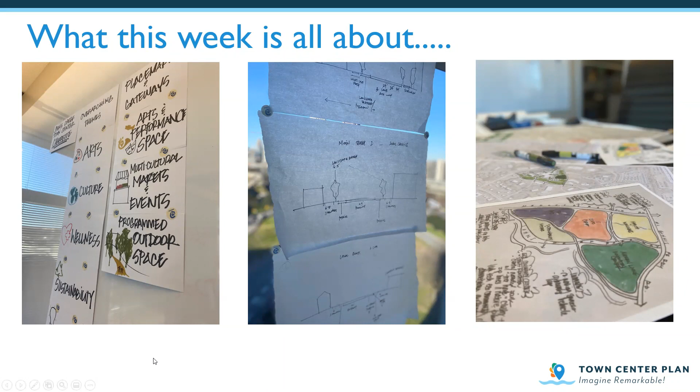So the first thing we did this week is create a series of design principles and vision.

We've proposed this vision for Johns Creek Town Center, that it is an iconic destination that represents the city's diversity, culture, and values. As both a gateway and a connector, the town center incorporates a series of experiences that appeal to a variety of audiences and age groups. This inclusive and remarkable place is defined by a series of neighborhoods connected via natural resources and greenways that is synonymous with wellness and sustainable living.

So this proposed vision was taken from ideas from interviews we had with stakeholders, from public comments using the Social Pinpoint website, and looking at physical characteristics of the site to create this broad vision. It's aspirational, what we want to see in 20 years and what we want to see happen over time.

The outgrowth of that are a series of design principles. So the goal is, as we come up with ideas and concepts, we want to make sure that the ideas and concepts align with these design principles.

The first one being is that town center's identity focuses on a clear connection between arts, culture, wellness, sustainability, and innovation. And beneath that come all the land uses that make a vibrant town center: office, residential, commercial, light industrial, innovation, thinking about wellness, as we mentioned there, thinking about sustainability and best practices in building and design. All those are couched in this idea.

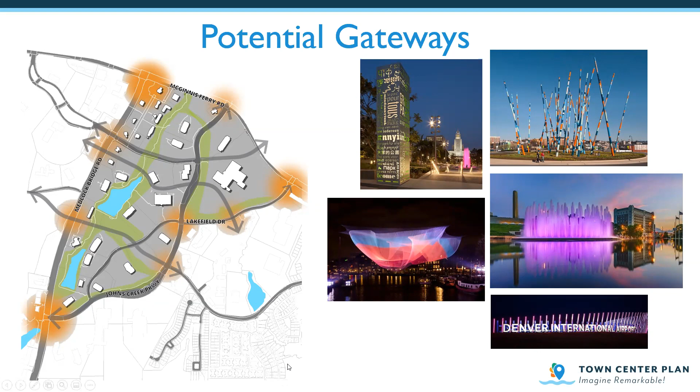We've talked a lot about different cultures and the way they do food and markets. So this idea of a year-round amazing concept for not just a farmer's market on Saturday, but a year-round regional destination. This could be something amazing and distinctive that other communities do not have regionally.

The idea of wellness. This town center is literally next door to Emory Healthcare. How do we engage those individuals? How do we engage Emory, bring it in and link those two, but promote wellness as a community? And that appeals to many people.

Sustainability and this idea of a biophilic city where we connect both people and nature in a unique place is something that draws inspiration, and it's done elsewhere, but it can be taken to the next level. And that's directly linked to the idea of innovation, right?

This idea that we need to be forward thinking about our architecture, forward thinking how we are going to do business in the future, forward thinking about our public spaces, forward thinking about our building and our build out, forward thinking about our stormwater management. These are all things that will help us innovate in the long term. And we have to be thinking this way because this is a 20-year vision.

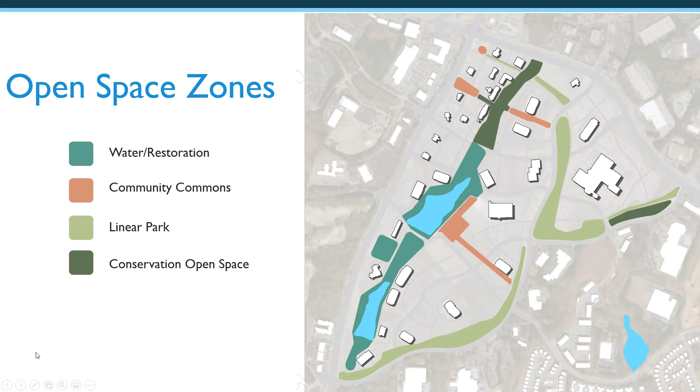So we took these open space zones and we began identifying key potential elements and items. And these are just a few. When you're talking about water restoration, how can we make it a place of play, bringing people closer to the pond's edge and making it a community space? How can we restore some of the ecology of the area, the streams, especially north of the northernmost pond, and really activate those spaces and really make it a learning opportunity?

With the community commons, where are the spaces we can create where we can bring people out, sitting next to cafes, enjoying their friends, playing cornhole, pop-up activities, enjoying art, having a programmed space for outdoor activities.

In the linear park, you can have both amazing open space opportunities, but the opportunity for a dog park, an organized space for a dog park, or an organized space for play, a true play for all ages, like you see here, that's represented in Maggie Daley Park in Chicago, or conservation open space, where these areas that are forested or areas even in Linear Park, how do we maintain them, preserve them, but give people greater access to nature and be sensitive to what we have out there in the natural environment?

So there's all these different tools and activities that can be done and strategies to really make these open spaces really an advantage and a great return on investment for the community.

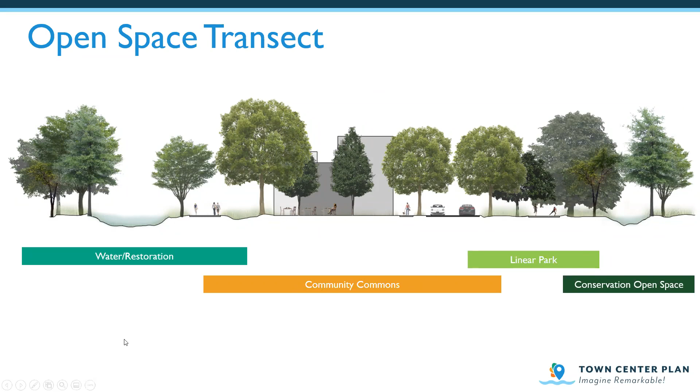So we took this idea and added another level, building a story from the existing conditions, themes, and gateways up to the open space and parks. We added another layer: this idea of the street grid, or designing a walkable community town center with a clear hierarchy of roads and spaces.

And really accentuating that, thinking about new connections and maybe dividing up the State Farm parcel, making more options here. This creates redundancy in the network, gives people more options as they're traveling through the space, and makes it more manageable from a traffic operations standpoint, but also opens up walkable neighborhoods with huge possibilities for diversity in what happens in them.

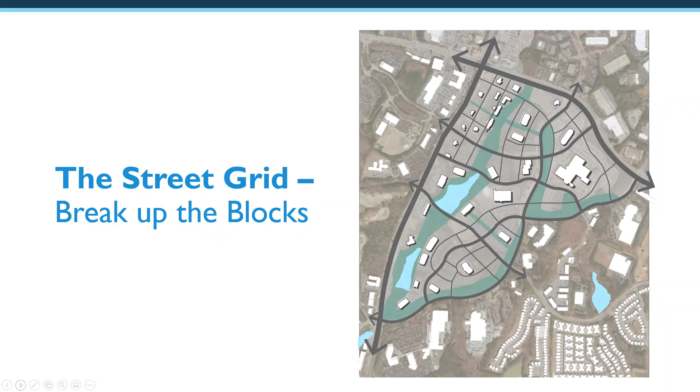So let's talk a little bit about these. We have these streetscape typologies: major highways, what we call main streets — the major thoroughfares through the area — a couple of options of shared streets, which we actually refined earlier, some locations of shared streets, and even local streets that connect people. Let's talk about each of these for a moment.

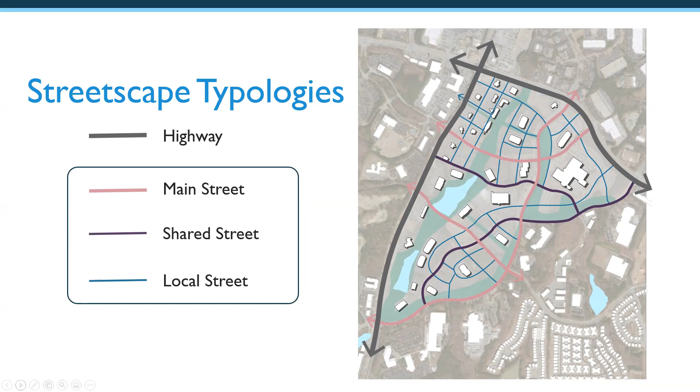By doing that, instead of having a roadway with a very wide buffer and very little activity in the middle, you can consolidate the roadway, introduce a very active multi-use path, introduce a linear park, and conserve and enhance a lot of open space that currently is not used well.

This also creates front doors for potential development sites like State Farm and other office parcels here — an innovative idea that works within the right-of-way, just using the existing public right-of-way better. And this now creates a parallel opportunity, in addition to a great main street, to parallel what's happening with the stream.

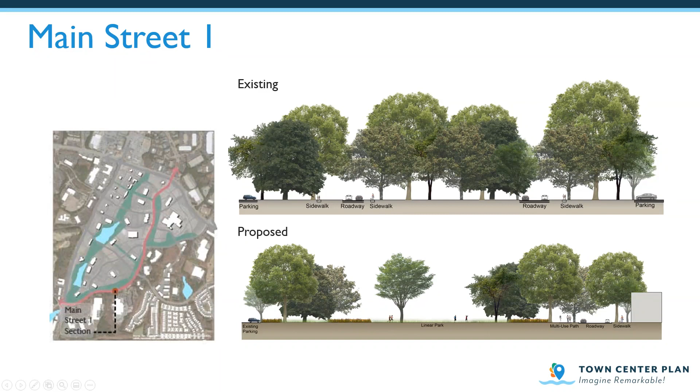That's the idea of some main streets through here as well. What you're doing on the main streets — some of these roads are simply 2-lane roads with very narrow sidewalks and limited buffers. You run on the backside of the road.

The same can be true for McGinnis Ferry. No one wants to walk down McGinnis Ferry — it's not comfortable, there are no buffers, it feels unsafe. Here's what we're trying to propose: as we retrofit these roads or add new road extensions, let's make the road more valuable.

Introducing on-street parking to support businesses, and establishing buffers for shade and trees and wider sidewalks, so you don't have to walk single file but can walk next to your spouse or friend as you're leisurely walking and looking at retail. This then activates the space behind the street, within the private right-of-way, to encourage redevelopment potential.

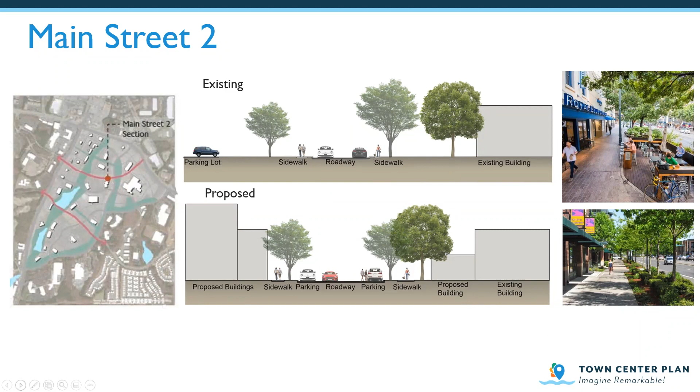We also have these ideas of local streets. We have some local street opportunities in here as well. They may not be as major, but you may still be able to find some on-street parking. It's typically 2-lane roads, and you might find them in more residential areas as well. So that is also an option.

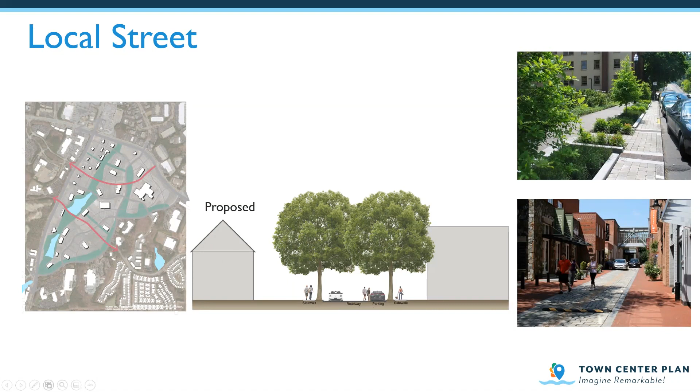And we also have these ideas of shared streets as well. These are not entirely all shared streets — what we were trying to highlight in certain segments, this is an incorrect map, but there are a couple of different locations in and around Johns Creek where you can take a block or two and turn a typical roadway with on-street parking into a shared street like you see on the right-hand side, something that can be closed down during the day.

It's a place where community spaces can gather and really activate the space in this corridor. So just a new idea, but it's innovative, and it lets us rethink how we do shared spaces and shared roadways.

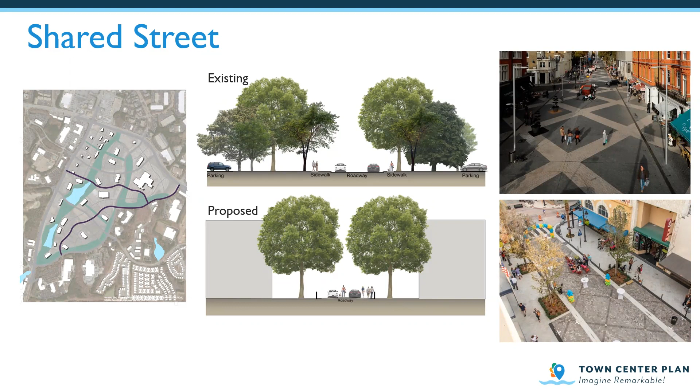So what we began doing after that is experimenting, as the TAC members know, with different areas of this entire area. I will show you that momentarily. But this is the entire 192 acres, and these are very possible uses.

As I mentioned, we began just kind of looking at building out the street grid network and adding in different potential uses. These can be mixed and matched, I want to be clear with that. But this gives you some form to think about how you can conceptually think about the different uses in and around here.

Whether it's civic uses, for instance, around City Hall and other places, or places of wellness like the existing Lifetime Fitness or maybe a new wellness center. You have mixed use, maybe 3 to 4 stories with residential on top of retail, or smaller, more village style or community residential on top of commercial 1 to 2 stories. You have shop fronts, which strengthens the edge along Medlock Bridge and McGinnis Ferry.

And the idea of office is thought about in this space as well, more office space intermingled through here. There's a whole potential to mix and match these ideas. It's a first snapshot. When you look at this, what I want you to see is there is now some structure to this and a more efficient use of development than what currently exists.

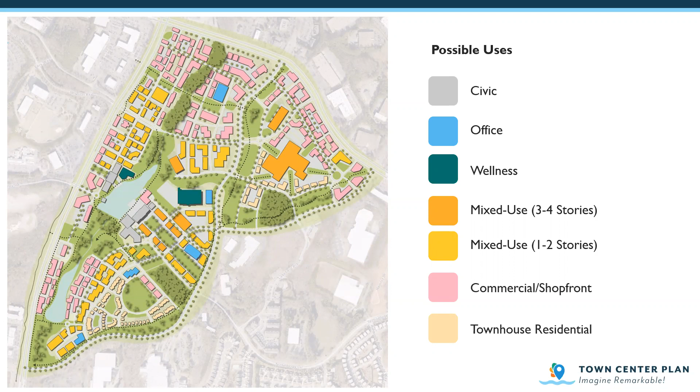When I look at that, what I see is structure forming, right? And when you see this, you should say this structure can be flexible. And so over time, as it responds to market conditions, we're going to continue looking at this and refining it.

As I mentioned, during the course of the week, we began this process by kind of chunking out these different areas, looking at the civic core area here first at a more granular level. And then this area, what we're calling Creekside, which we think has a really great branding opportunity. Really think about this as the Creekside Town Center, this idea of the Medlock McGinnis Corner.

This is the gateway not only into Johns Creek, but into an entirely new county. Huge opportunity to draw people from Forsyth County and market potential from Forsyth County. And then the State Farm area, right, kind of a campus in of itself. But how can we better link those two together?

So we begin, like I said, large scale, looking at the grid, the open space, the natural resources, and then begin building out a framework. So we're going to go through each of these now individually, beginning with number 1, which is the civic core.

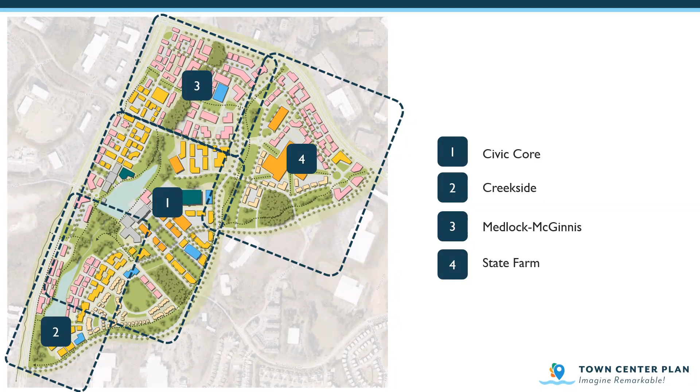As you can see, this is kind of our sketch where we began sketching out our ideas here with the civic core originally. We played around with a lot of different ideas. As the TAC members can attest, we modified this during the week and sketched out a couple of different alternatives.

But a couple of things we are looking at, I want to point out that could be really cool and really key to this. Number 1 is this idea of play. The civic area here, this is City Hall, currently parking lots. Our thought is to make a strong central core here of open space, and then redevelopment that actually looks out onto the open space, okay?

This idea that you can begin introducing iconic art at gateways and entertainment, maybe further down as you begin thinking about retrofitting these buildings with new arts, food and beverage opportunities—maybe a brewery or distillery, high-end dining. These are things that currently don't exist here but are a real draw further down in Creekside that we'll talk about momentarily. And there's opportunities for roundabouts and consistent themes, but don't just do a roundabout—do a roundabout with public art and really amazing opportunities.

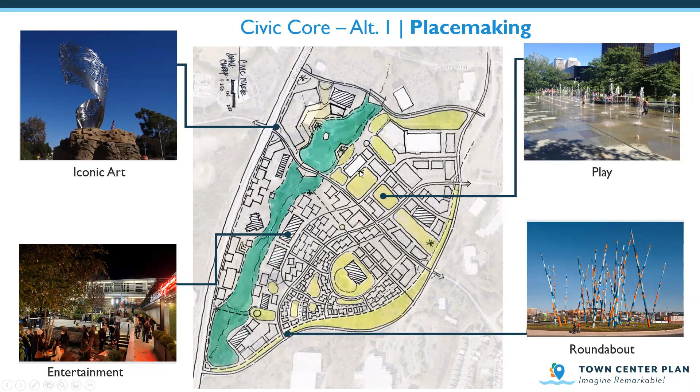So we began playing with this idea of the civic core, a community common space where people can engage one another and come out. And as part of that, we began testing other ideas.

Well, what about how do we begin thinking about farmers markets? How does that initiate? What does that look like? Could it be here? Could it be further down the way? How do we link the farmers market concept to the food and beverage and kind of an urban ag idea long term? That could be really innovative and not really done too much around here.

Maybe over time this area over here redevelops with different parts of residential. Maybe it warrants a new community center as a central space rather than a current office building. That might be a new use somewhere in around here.

New residential communities with high quality development and a diverse group of residential styles. And then storefronts in and around these commercial opportunities. The storefronts are critical because they need to be very much linked to streetscapes. They need to be very permeable, so it's walkable, and people can sit outside and connect.

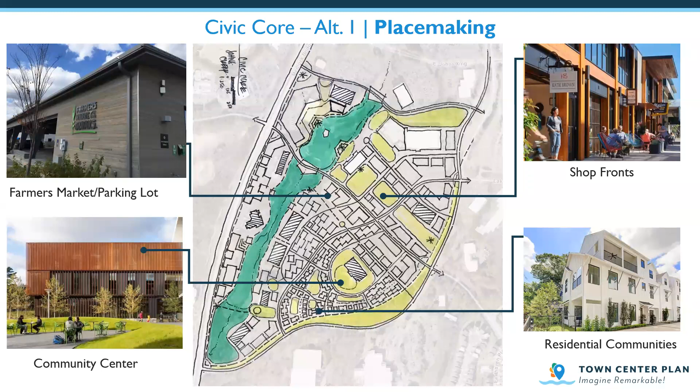So one of the things we began doing is we took this idea of this corner, this Civic Commons area, and some people were asking, okay, what does this look like in real life? Are we just drawing lines on a map, or what does this feel like in 3D? So here's an example of one.

So there's a lot of opportunities here in this space specifically.

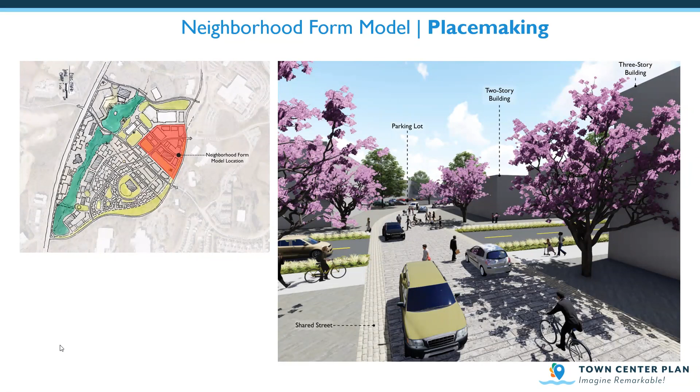Well, we did this for fun today. We built this out yesterday evening and this morning, just as an example. Things I want to point out—only the massing here, this is not really, but this represents what we've kind of drawn in. So now this becomes a place where you have storefronts opening up, a place to linger longer, to have entertainment.

We thought of this idea to continue the theme that this area along Johns Creek actually drains as a watershed down to the ponds. So wouldn't it be great to mimic that flow of water using this pathway, with open water themes, kind of ponds, spaces for stage areas, different elevations that all link down towards your city hall in the distance, with a shared street concept where people can linger and move freely through, outdoor patio seating for restaurants and bars. This can be a vibrant space long-term.

And remember, what you're looking at is public space. And one of the things we point out—and the reason we focused on civic core so much this week—is this is publicly owned land.

What can the city do to catalyze future development over time? Again, this isn't going to be overnight, but this could be a vision 5, 10 years from now. This is what the space you're experiencing and how it gets redeveloped over time.

These buildings incorporate covered parking. No longer do you just have some on-street parking, but you now have covered parking wrapped around with retail. You have maybe potentially a performing arts theater in the back here with a community civic center. These are all things massed out to represent that scale, that what could potentially happen here. Very cool ideas, very high level, but we wanted everyone to experience the space and the potential.

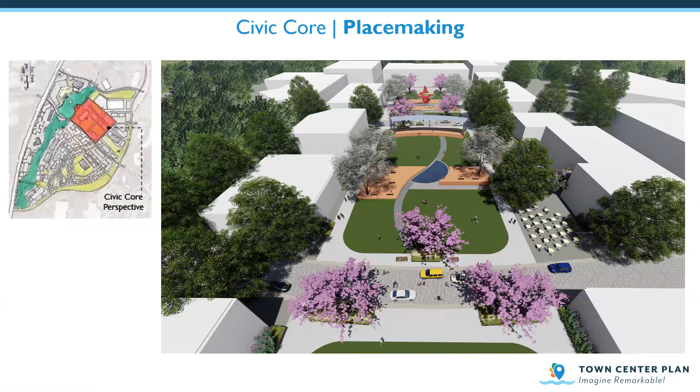We began saying, as a build on of that, what happens in these spaces? There's so many potentials, right? We believe there's a strong opportunity to connect the ponds to the back of City Hall as a starting point. What a great catalyst project, right? Linking the ponds and City Hall.

How do we bring people closer to the ponds? Floating decks allow them to move around and really engage the ponds better. A really cool immersive experience here could happen. Imagine out here that you even have maybe a deck where a symphony is playing for a concert and you're sitting over here in the amphitheater. Or what if this becomes the performing arts center potentially long term that has this iconic entrance and gateway into the space? Or even a great mixed use feel that creates this great connection here.

These are all things that can happen, but they need to be planned over time so you can take advantage of the natural assets and your public assets, which is really important. So many opportunities to kind of connect to different components of this.

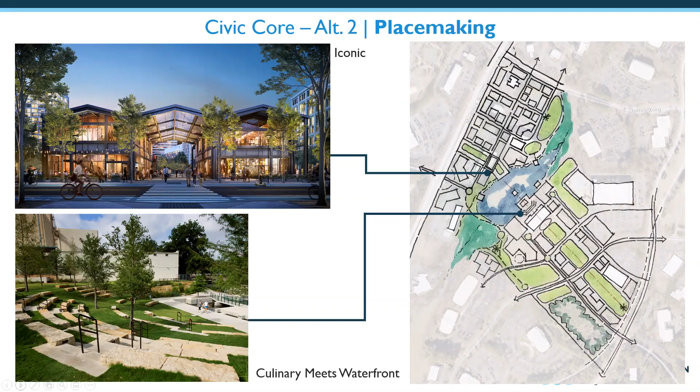The next items, you're not going to get any 3D renderings yet. We're still in the process of playing with those ideas, but we took this to the next level of this kind of creekside concept, which is here's City Hall where my mouse is. This is looking, so the north is up.

This is Medlock Bridge here, Johns Creek Parkway here, Lakefield here. So this area, and this is really conceptually, this is not what the ponds look like. I know this is kind of a blue color on here, but the pond is really more here, not all the way up here. This is this kind of artist coloring.

But think about this for a moment, this creekside concept all along through here. What could this be? Look over here to the right. This could be a great, amazing space where you have food and beverage, linking amazing spaces for outdoor activities along the creek, just like this space is here. Opportunities for flexible scenic walkways and pathways entirely around the creek.

I use this option too. This is from the High Line in New York, and obviously we're not doing the High Line here, but whatever we do, even in the finest of details, in the benches you do, and the trash receptacles you select, and the pavilions you build, need to represent Johns Creek. They need to be uniquely Johns Creek.

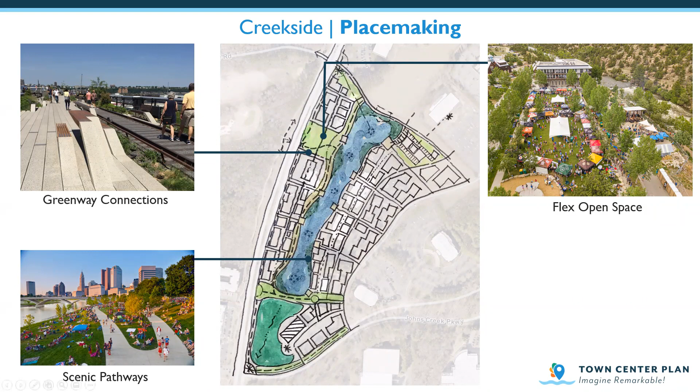So I think that is really important to keep in mind. We transferred up to Medlock and McGinnis Ferry. Key things to point out here: this corner, there's already an existing grid that was established when this was originally developed. Let's continue thinking this out.

This is an immersive art experience in here. This is actually the tunnel under Medlock right now. It's a great space, but it kind of leads to a very unexciting pathway, but could potentially lead all the way back past the existing hotels, which are seen still here, existing, to the creek.

You could introduce along the space a nature walk down along the creek. You could do immersive art in this space here along the pathways. This creates a lot of interest because now you have people who have office here, you have hospitality, you have restaurants. Wow, this is really interesting. Now people can come across the way and really have an engaging experience, spending more time along the creek and visiting more space. So this will take place over time to be sure.

We think there's a lot of synergy with this idea of Emory Healthcare, Johns Creek next door, opposite Medlock Bridge right over here. There's a need for an expansion of wellness, a great concept for town center to be a center of wellness. We use this existing building as an opportunity. Could this be retrofitted long-term? Do you build a new building? Is this even the location for a wellness center? Possibly. But wouldn't it be great to have a wellness center over here, 20 to 25,000 square feet along the riverfront, which then spurs other development opportunities for medical office and medical research opportunities linked to wellness. And by the way, it's on a creek along a trail network that promotes further health and wellness. So a lot of synergy there.

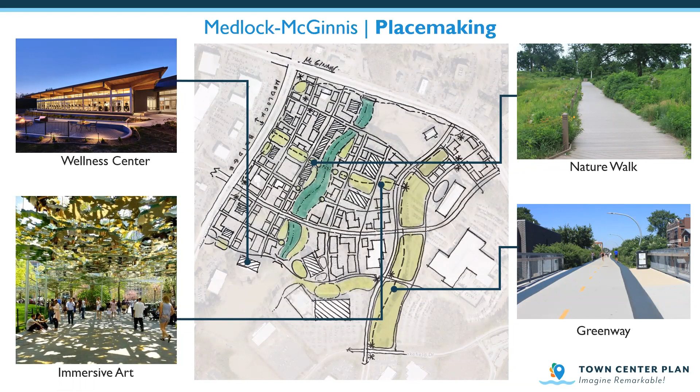And of course, I know people are asking, are we thinking about how you get to Johns Creek with a greenway and trail to the town center? Absolutely. That's something we're still working on with city staff, how we connect externally to the site, but we have some ideas we're still playing with. So that's certainly part of the conversation.